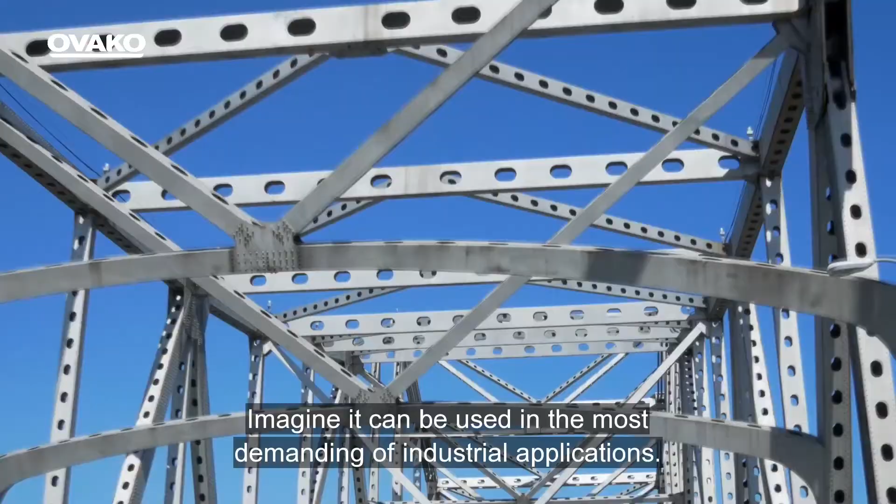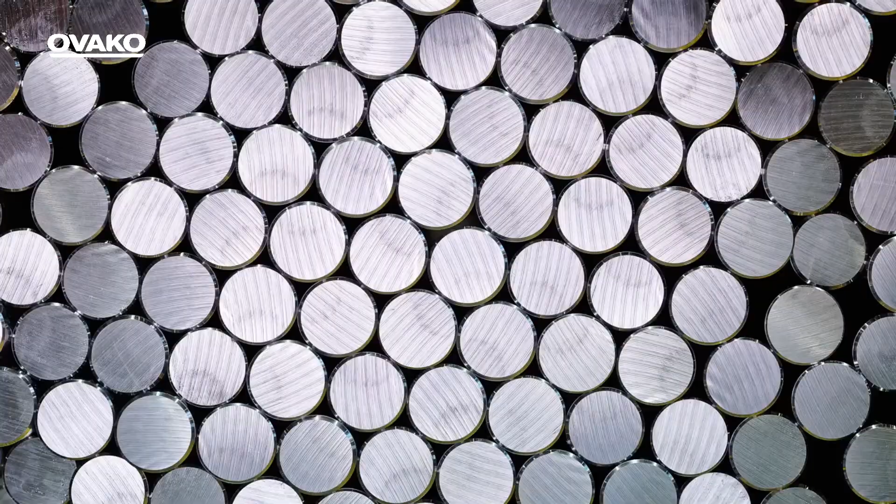Imagine steel of the highest strength and quality. Imagine it can be used in the most demanding of industrial applications. And imagine it can be used over and over again. Now, what would you like to do with it? We are Ovako. Our material is engineering steel, and we know that with the right steel, imagination is your only limit.

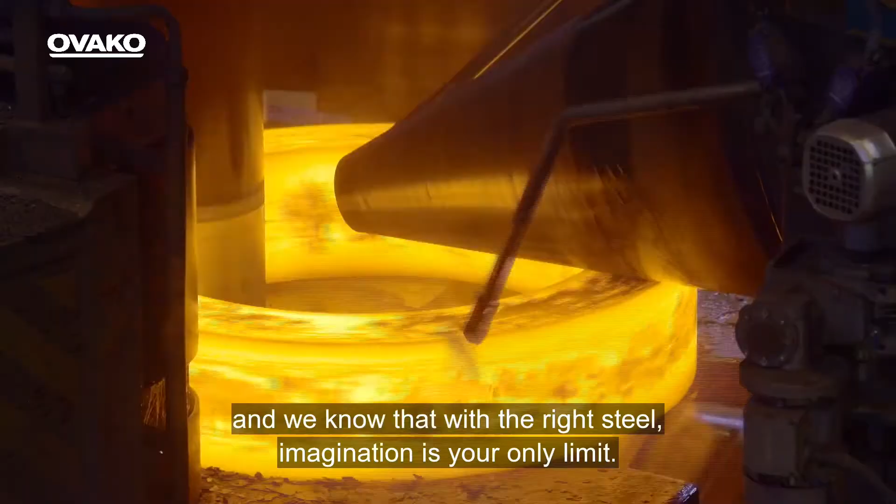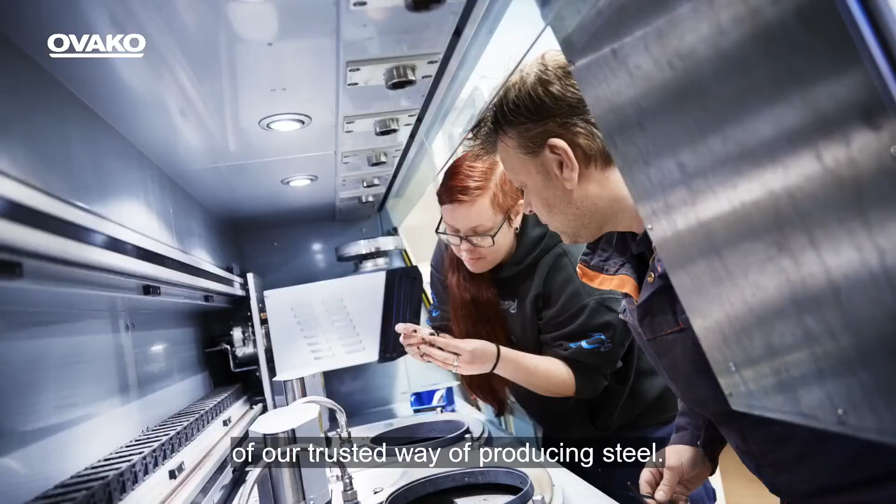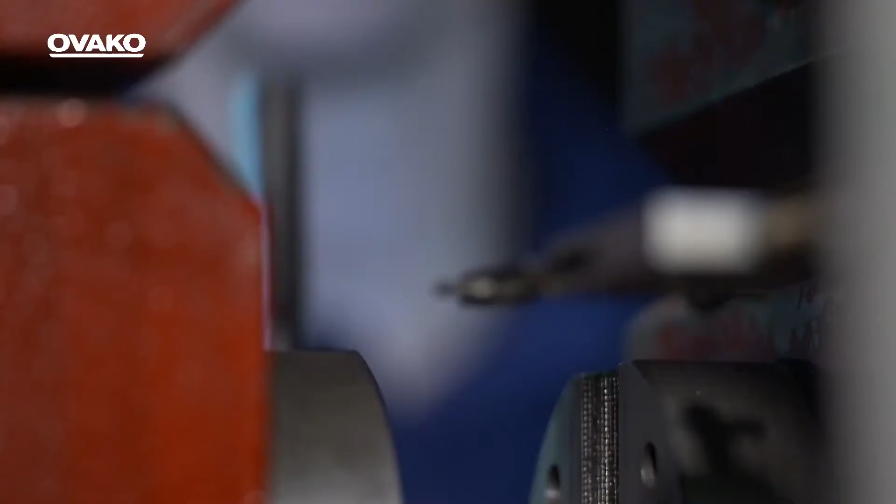We've been doing this since the 17th century. Throughout changes in the organization, the local production sites remain the heart of our production. And the knowledge of our people is the core of our trusted way of producing steel. Safety is our top priority in everything we do. We are determined to reach our long-term goal of a zero-accident workplace. We are proud of our way of working with broad networks in research and development. Together with our customers, we design steel that solves their specific needs.

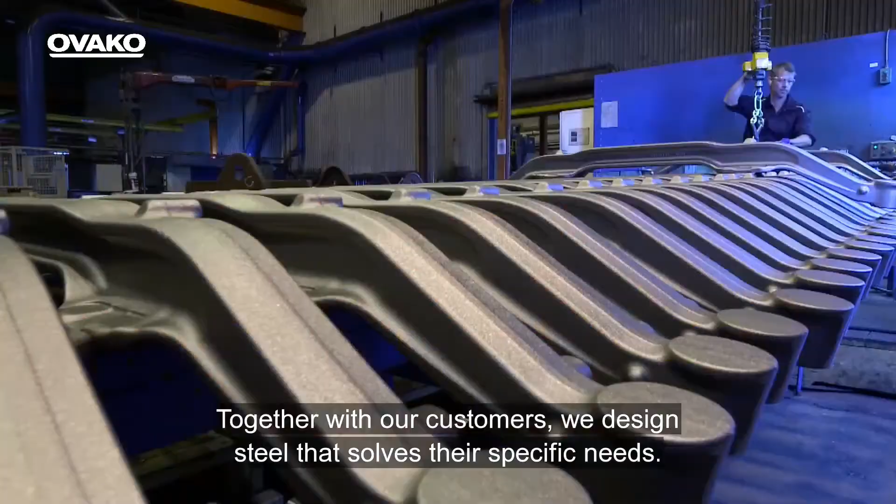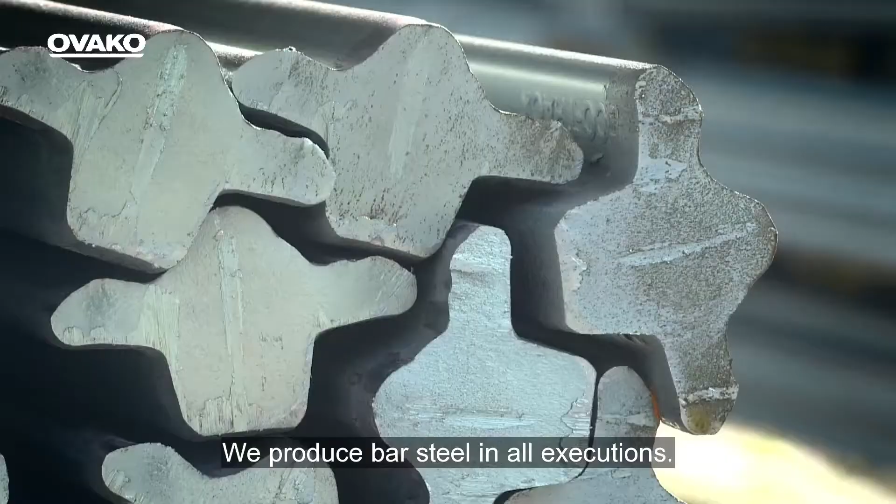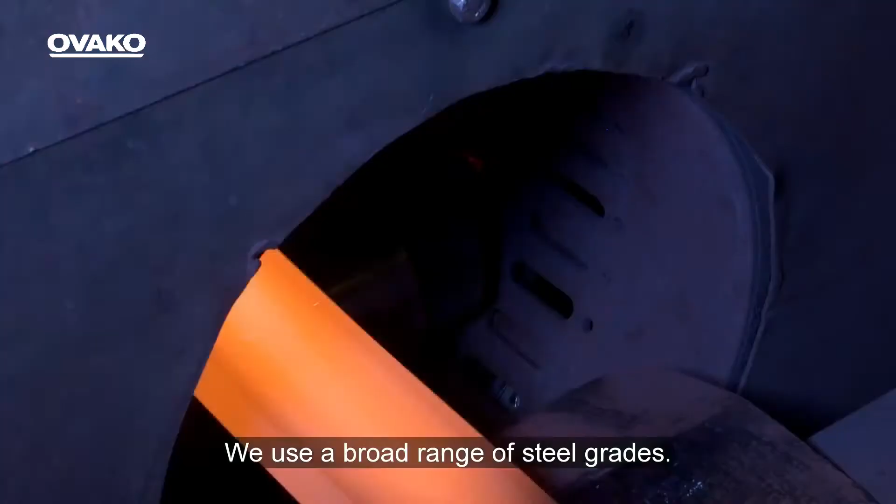All our steel comes from scrap. We produce bar steel in all executions. We also produce tube, ring, and wire, and supply an industry-leading range of hard-chromed long products. We use a broad range of steel grades. The steel grades are grouped into our brand families to meet different customer demands, proving again and again that imagination is your only limit.

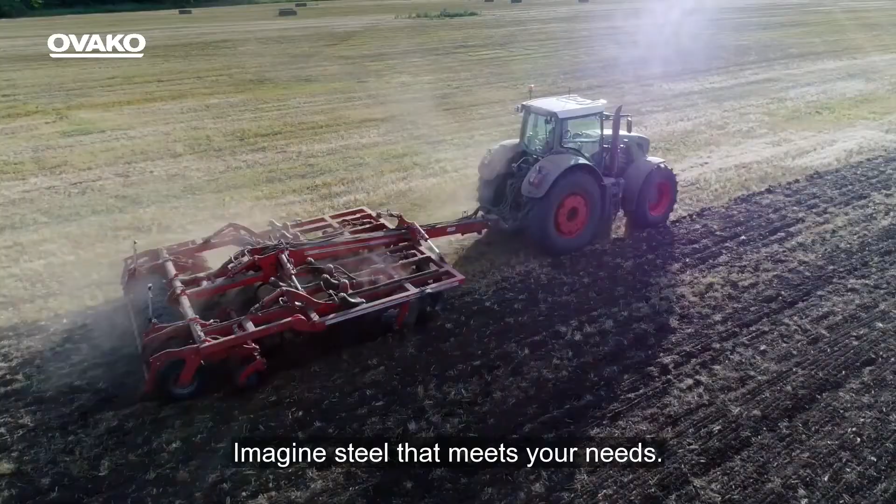Imagine steel that meets your needs. Now, imagine it being even better.

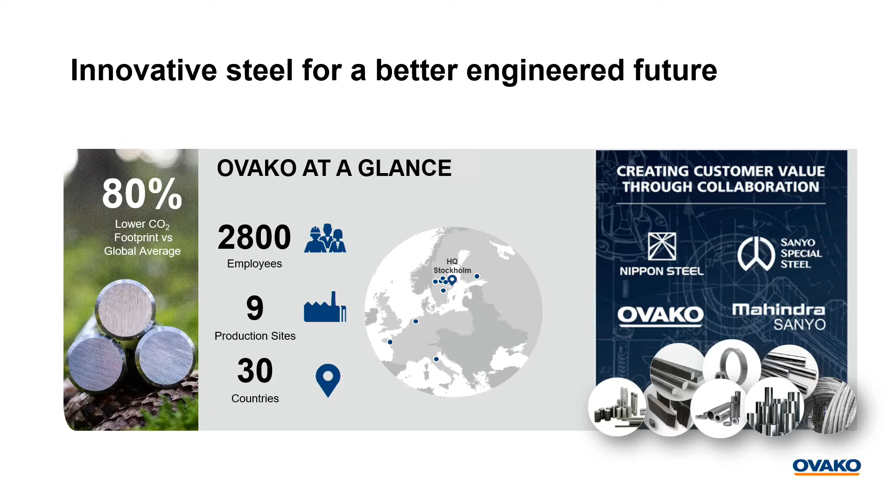largest steel producers in the world. Together with Nippon Steel and Sanyo Special Steel, we are and have a world-leading position.

And to conclude the high-level description of Ovako, I also want to mention our sustainability efforts, which I'm actually very proud of. Environmental aspects together with employee safety have always been a fundamental part of Ovako's business.

We have a carbon footprint that is 80% lower than the global average. And employee safety is top priority for us. And our long-term target is, of course, to have 0 accidents in our workplaces.

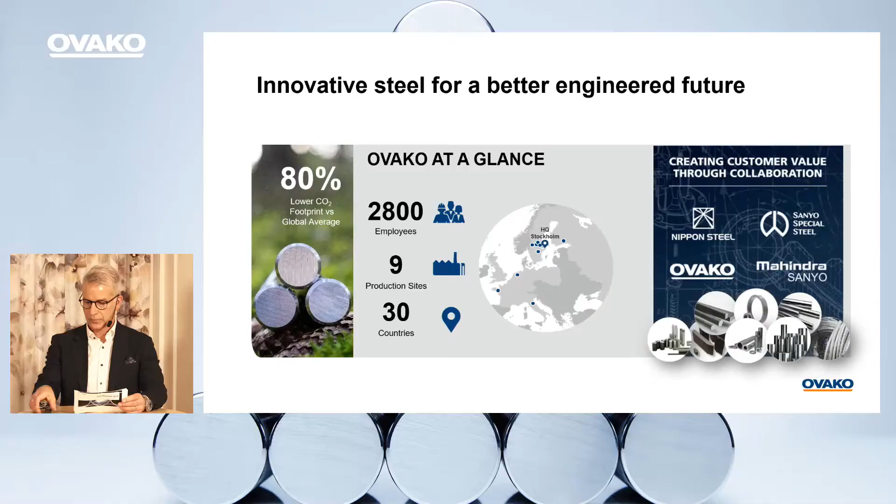Short about the business unit Smedbox. We have an efficient billet casting process with different rolling mills and the ability to customize steel products. We have a steel mill located here in Smedjebacken, where it's 100% scrap-based. We also have a medium section rolling mill and further downstream processes. It's a lovely picture from the Smedjebacken plant located in Dalarna.

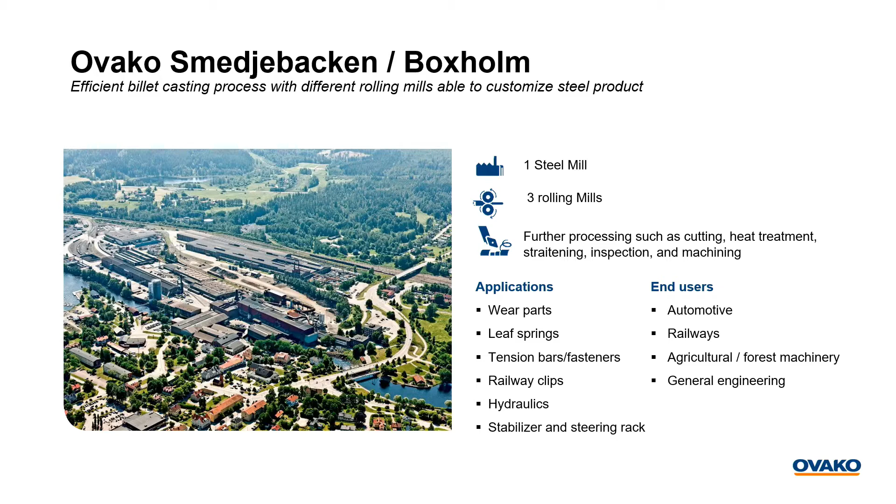We have a long tradition of steel making, starting all the way back to the 1700s. Today we are 540 skilled employees in the business unit, and we have the capabilities of rolling rounds, square, flats, and special profiles. In Boxholm, we have 2 rolling mills, one medium and one fine section mill, and also further downstream processing.

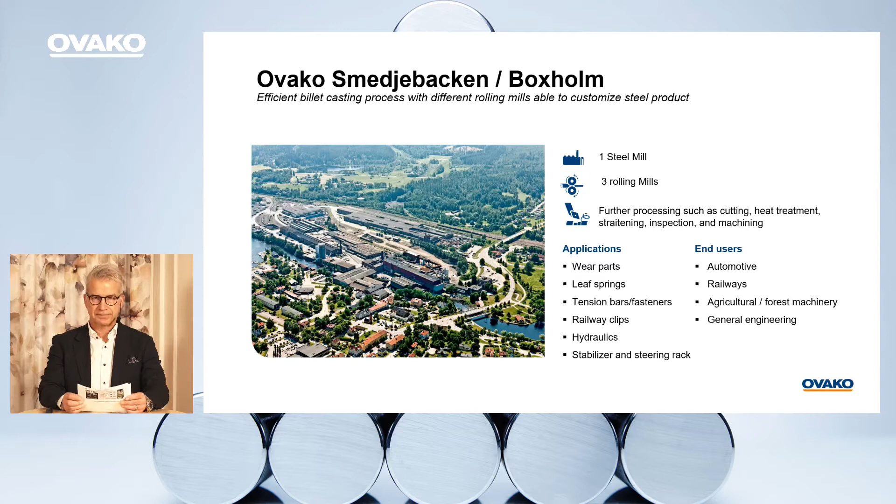Now back to why we are actually here: the investment in our vacuum tank degasser in Smedjebacken. This will create new opportunities for us. As you all know, the demand towards steel of higher performance and quality has continuously increased. I'm very happy and proud that our owner, as one of the first decisions they took, was to approve the investment in the vacuum tank degassing facility here in Smedjebacken. The investment will lead to improved steel quality, more efficient production flows, environmental improvements, and new business opportunities for us.

In this slide you see a picture, an old picture from the 50s, and a picture from our new vacuum facility. As you can see, a lot has happened since then.

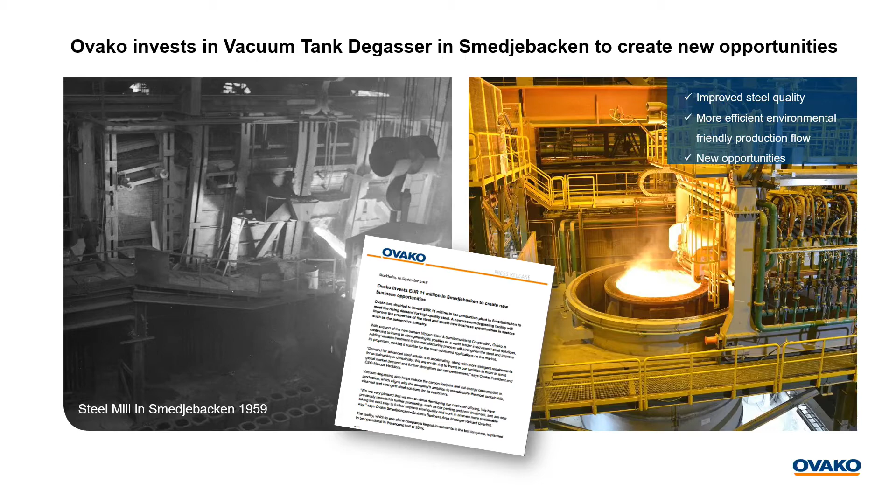The VTD investment, together with the investment we did in continuous casting in 2014, will take Smedjebacken to the next level when it comes to quality and performance.

One anecdote: back then, when they had the opening ceremony for the new continuous casting, I was here attending as a customer. I remember being really impressed by the investment they had made, but also remembering that in the end, I mentioned to the Ovako guys at that time that there was only one thing missing now, and that's the vacuum tank degassing.

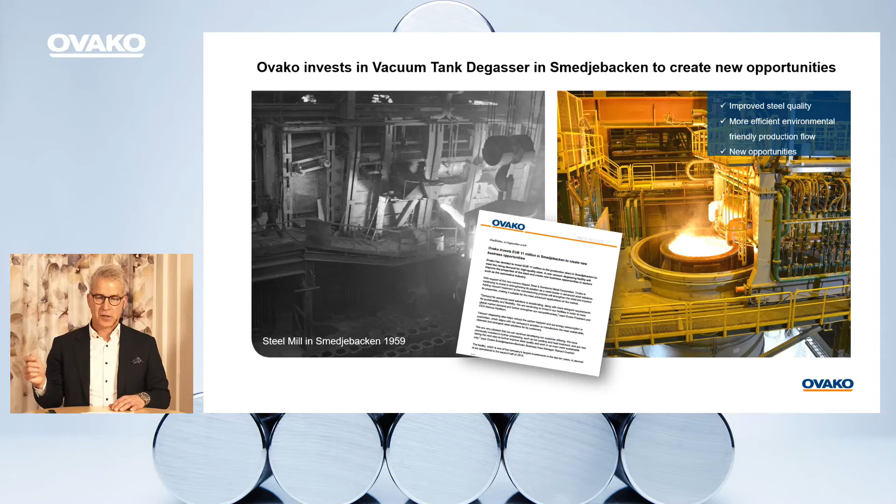So here I am, standing responsible for the business unit Smedbox, presenting our new investment in the vacuum tank degassing. This shows that we are really investing for the future.

With that, I will show you a short movie before I hand over the word to Göran Nyström, Ovako's Executive Vice President, Group Marketing and Technology.

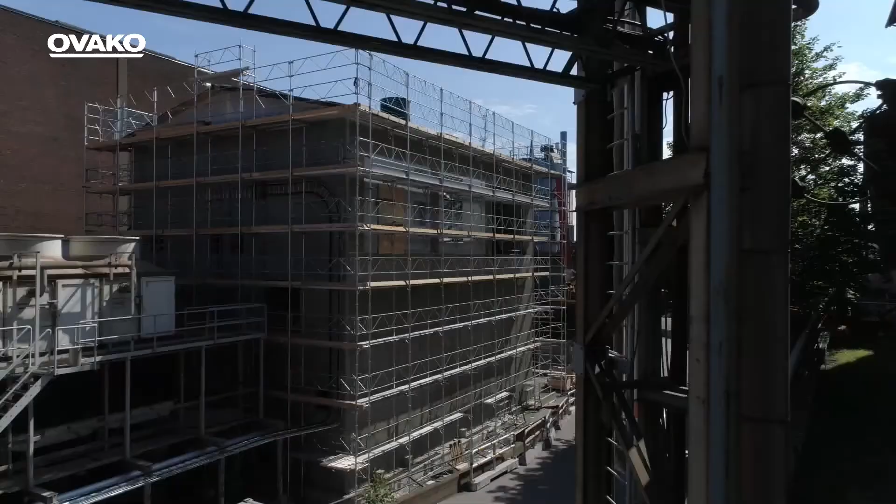So from one Göran to the next Göran, I'm pleased to be here as well. Of course, we would have loved to see you here in person, but we are filled with pride and joy to present our VTD investment here in Smedjebacken.

My role today is to talk about the growing importance of clean and sustainable steel, something we're also very happy and proud about. The world is built with the help of steel. 90% of all metal traded products are steel. One third of the mass of the earth is iron. So it's a part of our society, the building blocks for our society. But there are big differences between steel and steel.

At Ovako, our vision is innovative steel for a better engineered future. We believe that you can make a difference by choosing the right steel performance, the performance that is fit for purpose to create the best performing products.

With Ovako as a supply chain partner, we provide clean, high-performing steels that enable large CO2 savings in their end-use applications. This is our biggest contribution to sustainability in the world. But also, when you look at one ton of steel compared to another ton of steel, the cradle-to-gate footprint, all the carbon dioxide generated, we have among all our peers a world-leading footprint. And we can also provide you data for all individual product deliveries, the product forms, the alloys that you buy from us.

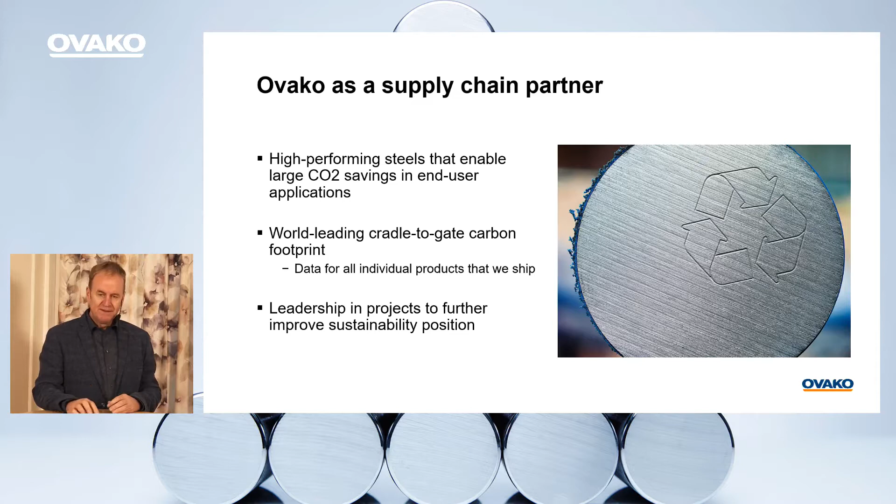Now, clean steel. I think most people by now realize that to make a really high-performing steel, you also need to control the inside of the steel, the cleanness of the steel. At Ovako, this has been a very important topic for a century.

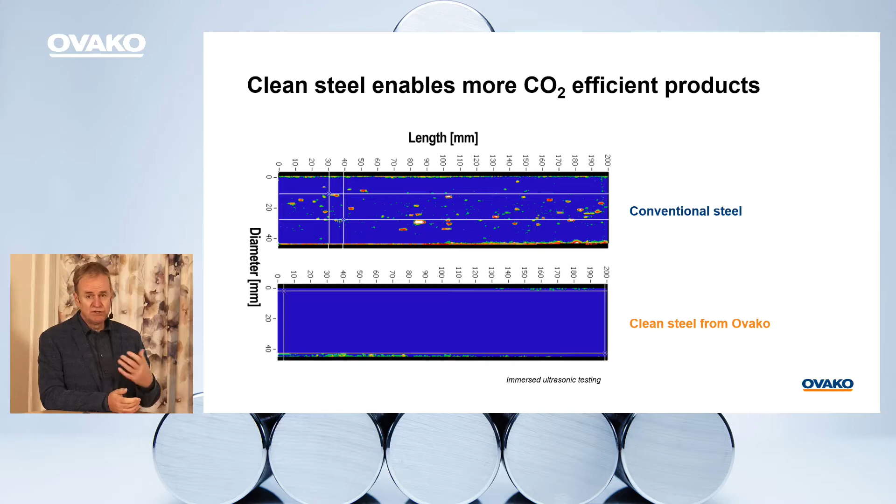We have different types of options depending on the mills we supply from. But typically, you can roughly say there is a large family of conventional steels, and then you have clean steels. It's not so easy to see the difference, but you can do it with high technology, ultrasonic scanning immersed in water with high frequencies, a technology that is constantly being developed. Then you can actually see the inside of the steel. On this image, you see the difference between conventional steels and clean steels.

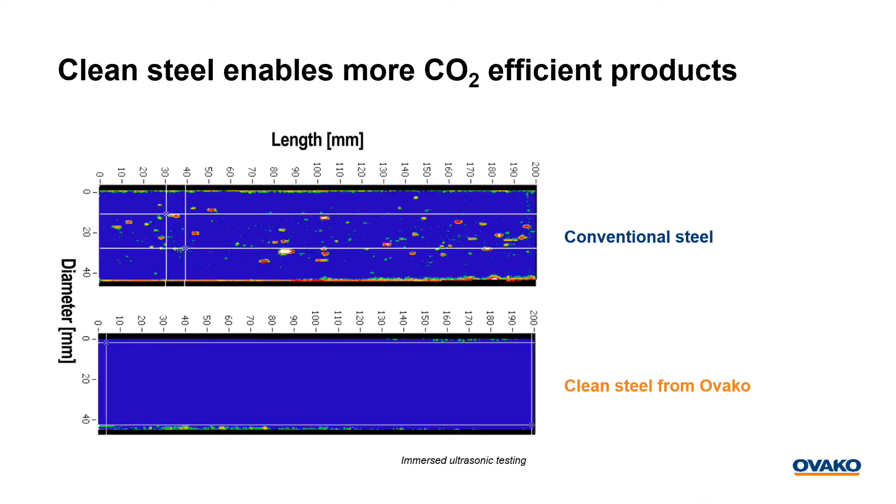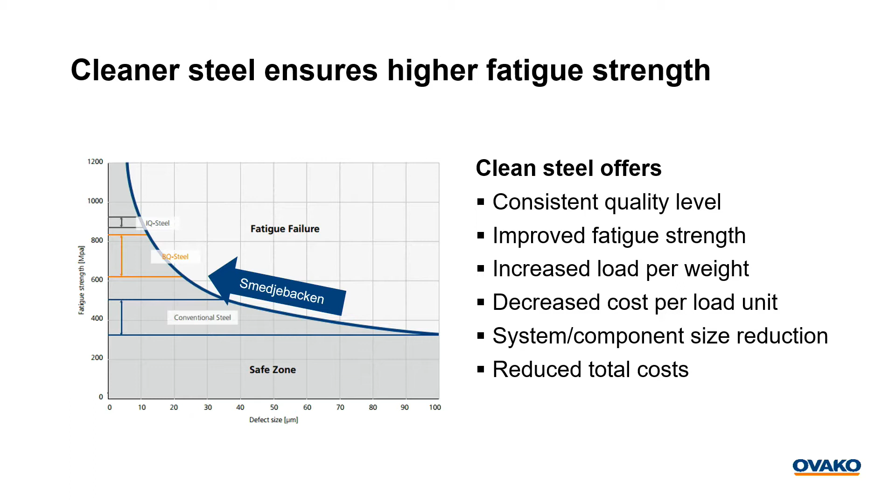We like to talk about this diagram, maybe a bit hard to read, but it shows on the x-axis the critical size of inclusions inside the steel, and on the y-axis, the fatigue strength. The fatigue strength is what decides how the product can be designed. In fact, about 90% of the world's failures is due to fatigue, it's been stated. So with a cleaner steel, you also ensure a higher fatigue strength.

Smedjebacken, by this investment, is moving up the ladder, taking a big leap and chasing what we already have in Imatra and Hofors. So the products become more dependable, and the designs they help facilitate can become smarter, lighter weight, longer life, reduced total costs. So congratulations to Smedjebacken, this is a big step.

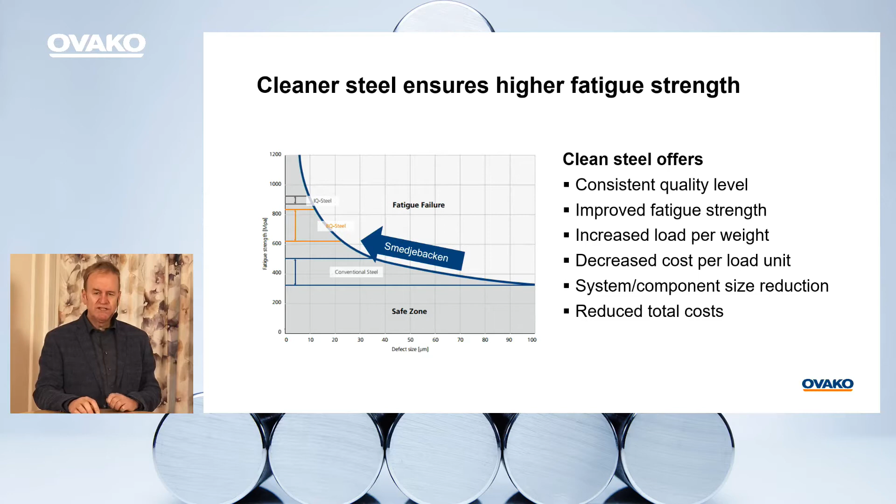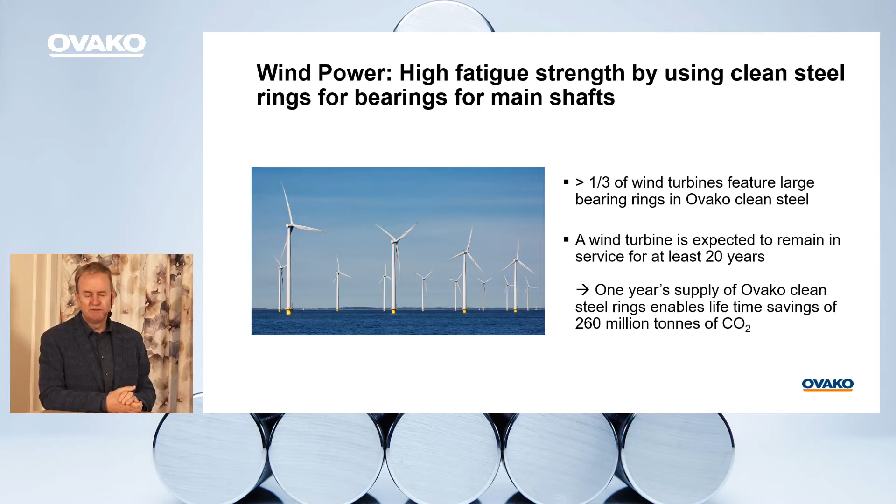Just one example of what our products can do in actual end-use applications. This is for wind power. More than a third of the wind turbines in the world feature large bearing rings from Ovako, in this case from Hofors. And when you look at just a small portion of what we produce in Hofors, one year's production of rings can actually facilitate a lifetime saving of 260 million tons of carbon dioxide. Big numbers.

But that aside, we also need to consider the carbon footprint of steel making. And since steel is so abundant on Earth, the total CO2 emissions from steel is quite large. It's somewhere 8 up to 10% of CO2 emissions on the planet.

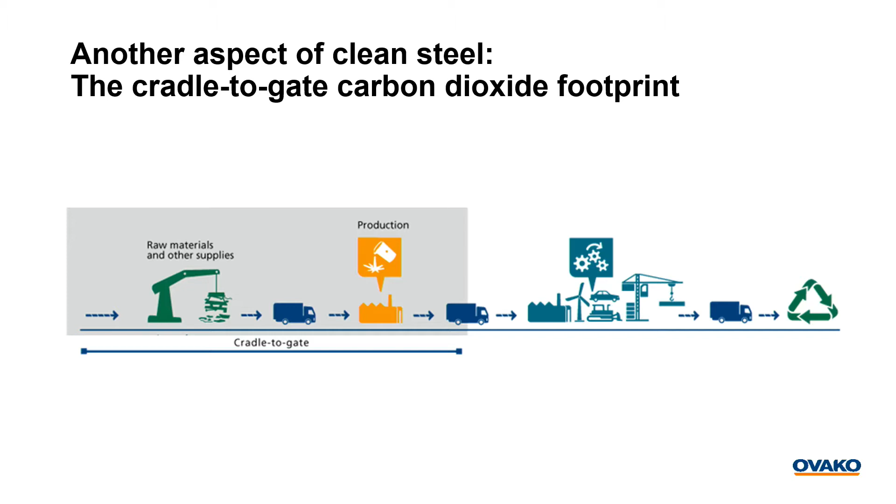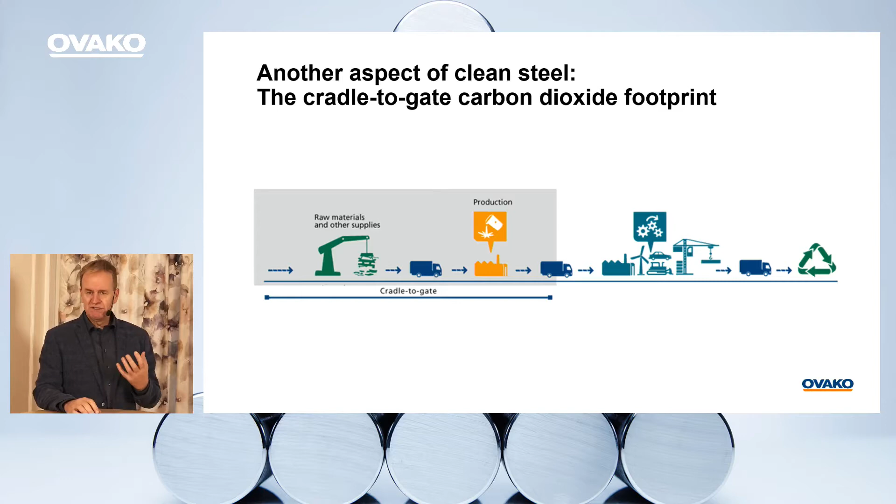When we look at this, we look at what we think is the only reasonable way of looking at it, that is to include all upstream sources of carbon dioxide. We take responsibility also for those. And then we combine that with our own operations, and then we look at the product that actually leaves our facilities, and we consider all yield losses, etc. That's what's called the cradle-to-gate carbon dioxide footprint. That means it becomes clearly measurable, and it also means taking responsibility.

When we do that, and we compare our operations, we actually find that Smedjebacken Boxholm operations is the best we have in the group. And among all our peers, it's the best in the world. So when we look around to try to find a better benchmark, we have not found anything that can compete with this. 389 is the latest figure, it's quite new. So again, congratulations, Smedjebacken.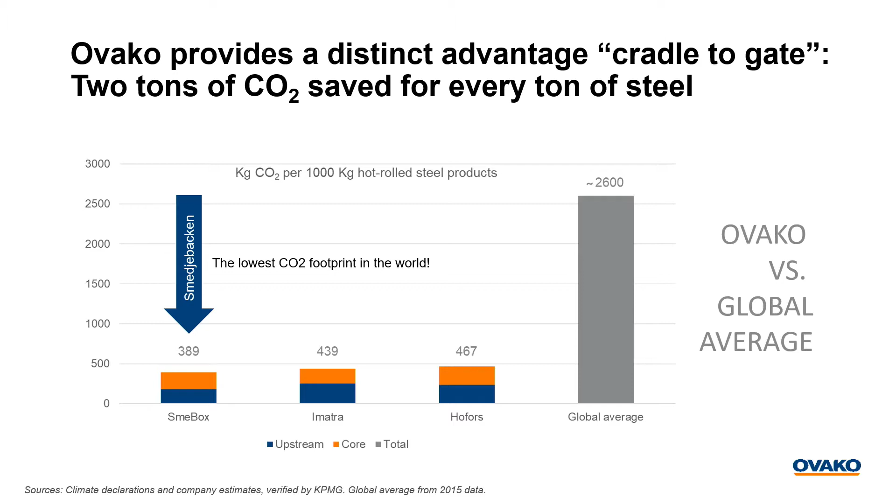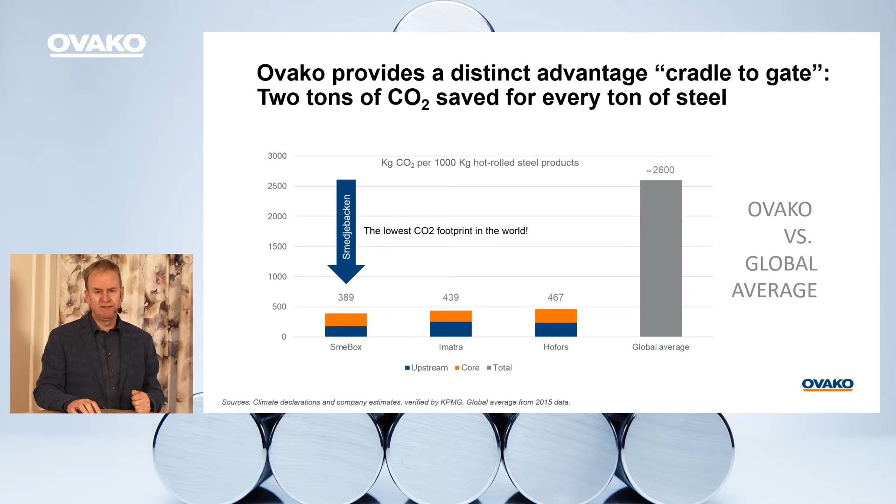If we look at the world global average, it's about 2,600 kilos, considering all upstream sources and yield losses. So we can say that by buying one ton of steel from Ovako versus the global average, there is a saving of 2 tons of carbon dioxide. And that doesn't go away. That saving, in a cradle-to-gate perspective, stays with the products that you, our customers, produce.

With this new VTD investment, we are taking further steps to improve sustainability. We believe it's around 3,500 tons per year of carbon dioxide that we are removing, and that's not yet included in the figures you saw on the previous page. So the cradle-to-gate footprint for Smedjebacken will continue to be improved.

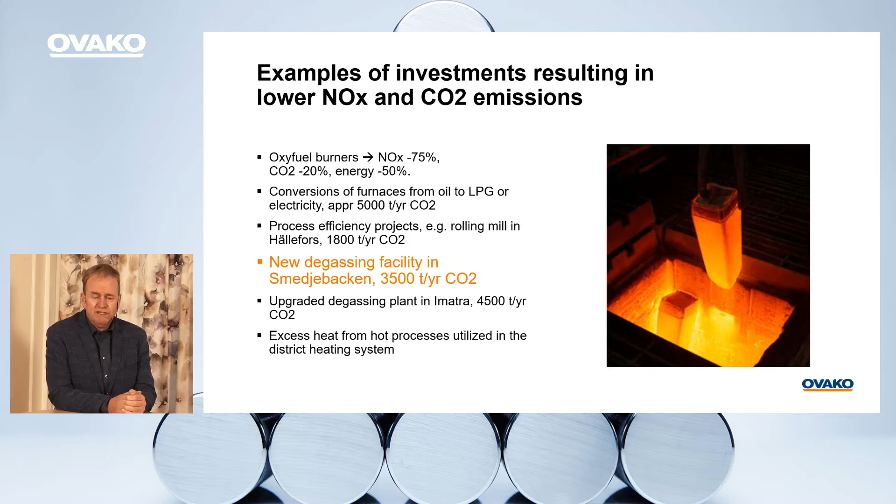And it's like this, by many steps, that we will continue to develop our leadership in sustainability. We will consider all upstream sources in our purchasing and make those decisions based on sustainability. And we will ensure a fact-based approach and give you, our customers, detailed product declarations where you can see what the carbon footprint is for our products. And we will lead the development towards further sustainability for us and for the steel industry by close involvement in a number of key projects. So this is our promise for the future.

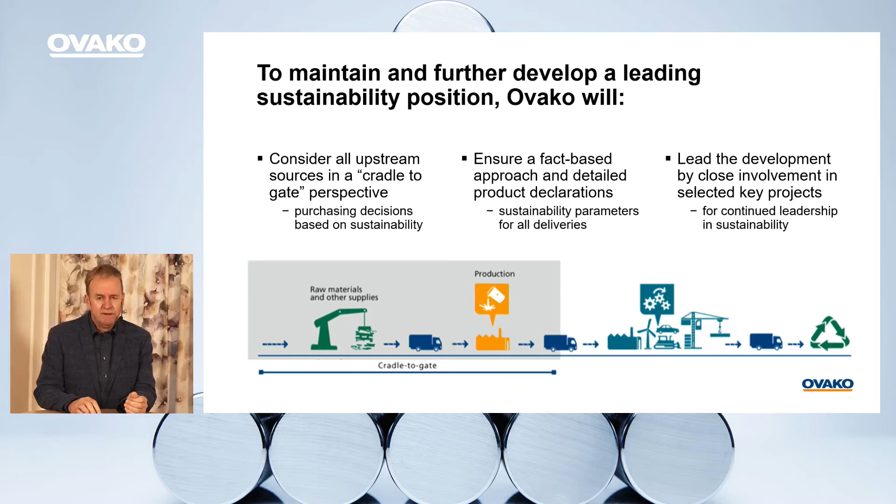So in summary, it's the value chain perspective that helps to promote the right decision making by working as a supply chain partner close to end-use applications, but also upstream. You saw how the cradle-to-gate perspective involves suppliers and all incoming materials. And you saw also how end-use applications, such as wind power, require close collaboration in product development and quality along this supply chain.

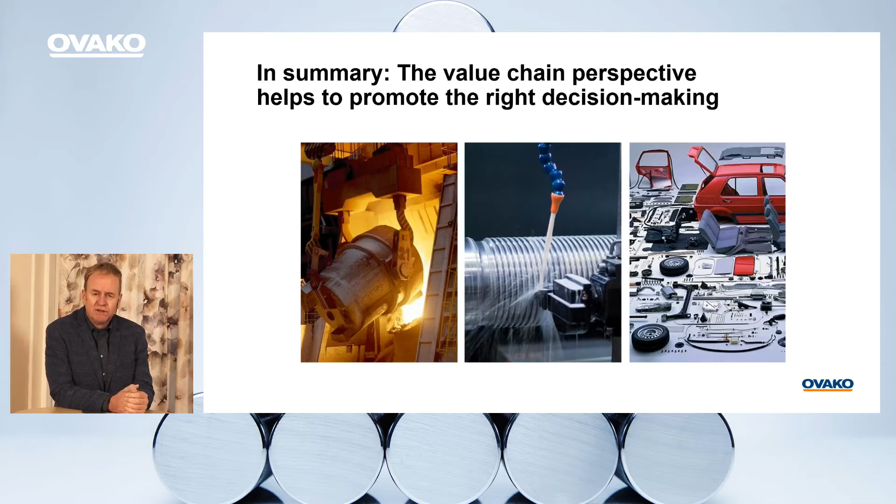In summary, this actually means that what you see here, Smedjebacken, with the blue water and green forests, is actually your strength. It's our customer's strength. What we do here to produce the most sustainable products, high-performing clean steels, is something that will be for the benefit of you in your products and in your cradle-to-gate footprint.

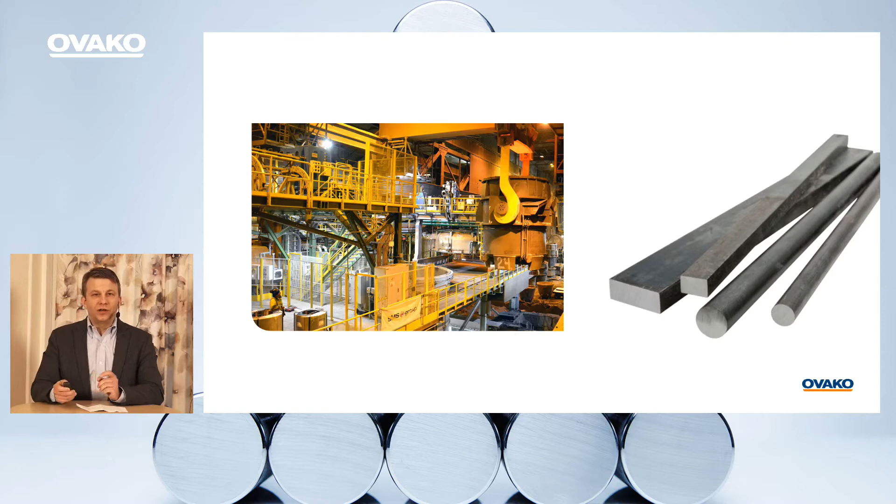I would like to start by going back a couple of years, to 2014, to talk about what was happening then.

In 2014, we made a big investment in a new continuous caster. We invested in a new caster for the future.

But not only did we invest in a state-of-the-art caster, we also made it possible to increase our billet size. Historically, we have cast 125 millimeter squares and 165.

With this new investment, we had the possibility to go up and cast 200 millimeter square. And the new caster is also prepared to go even further than that in the future.

This opened up a lot of new possibilities for us. Hans, you're out there on the market talking to our customers all the time. What was the reaction back then in 2014-15 when you came out? What was the response?

I would say the response was very positive, if not fantastic, because having the possibility to cast 200 square enables us to enlarge our product range and size range.

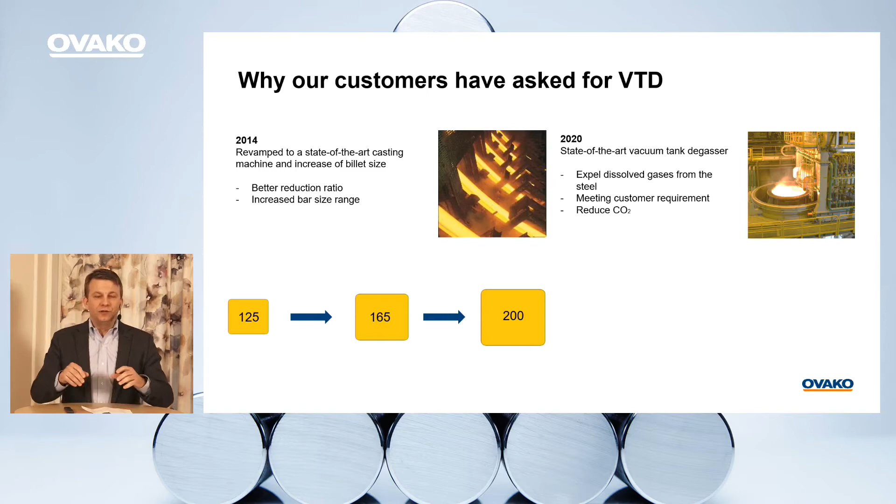Hans, with your long experience in the steel business, are there any special segments or products you see potentially going forward here?

Adam, I would almost say too many to mention. I think the vacuum tank degasser investment has been on our wish list for at least 15 years. It has been, in one of my previous roles, sort of frustrating that we saw a lot of inquiries demanding vacuum degassed steel.

And basically, we couldn't offer it. So to have that opportunity now is simply fantastic, is great. It's something that makes my sales heart beat a little bit faster.

Coming back to your question, I think one of the products that we already have is the SP bars, but in combination with vacuum degassing, maybe Adam, you can tell a little bit more about that.

Absolutely, I would love to. I think we can stop there a little bit and talk about our SP bar, and the reason and the key to the success that we've had with the SP bar.

Especially into the automotive sector, the key is repeatability. That's the benefit of the SP bar.

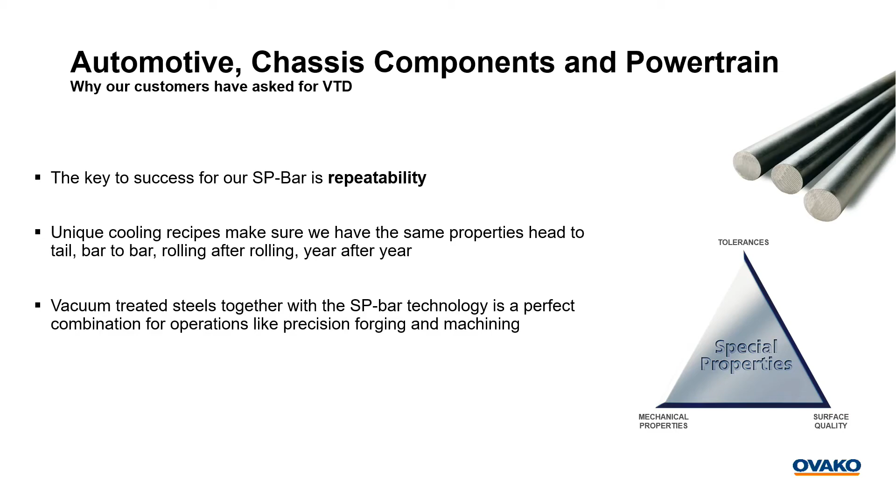This is because we can control the finishing rolling temperature. We are controlling the temperature during the rolling, and for every product we have unique recipes.

This means that we will get the same properties, head to tail, bar to bar, rolling after rolling, year after year. So you will always have the same properties.

Connecting this now with the SP bar, with the bigger billet sizes and the vacuum degassing, that's going to be a fantastic combination going forward, especially towards the automotive and forging industry and machining shops and so forth.

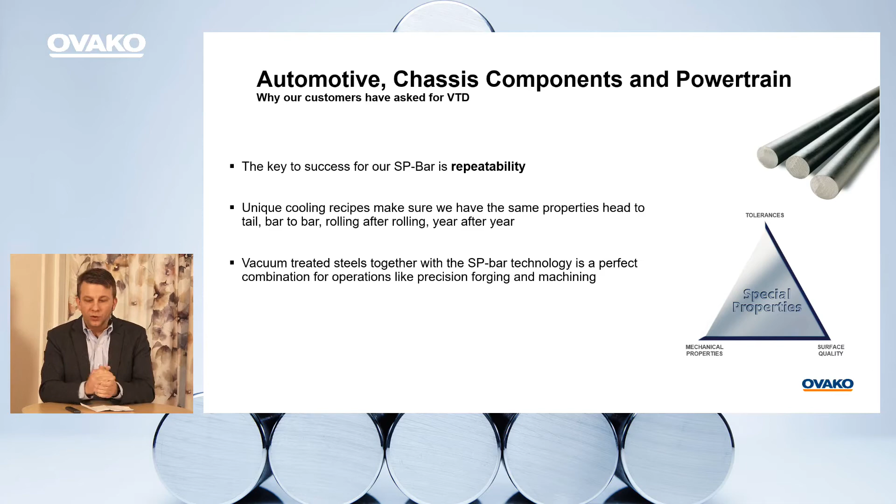So just bear with me here, Hans. We see new potential, but we've also developed products with the SP bar for 10, 15 years.

Especially into applications like steering racks and stabilizer bars, for both cars and commercial vehicles. But of course, our customers are developing, and we want to follow.

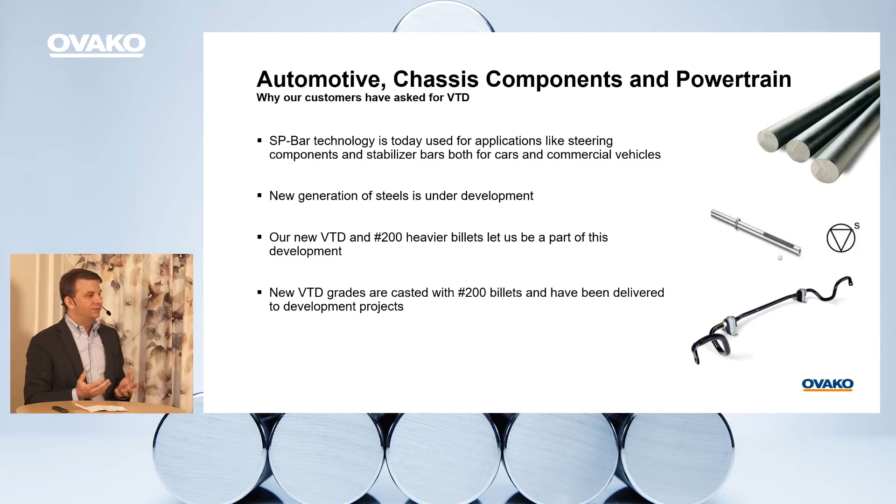And we see now with the new steels coming out that the requirement is that we need vacuum degassing and bigger billets to fulfill the properties that they are asking. We have already produced grades for these applications that are under development and on the way out on the market.

But Hans, we've talked about round bars, but Smedjebacken is much more than just round bars. 50% of what we're doing are flat bars, also into automotive. With your experience, can you tell us what you see as the potential from the flat bar side? Yeah, gladly.

Flat bars, as you mentioned, is 50% of what we do, and especially in the spring segment we've had a very interesting journey, I'd say 15 to 20 years. We've established ourselves as a quality supplier, known for very good surface quality, which is a very important criteria in this segment. But also here the demands on the steel, the fatigue life etc., is increasing, so now adding the vacuum degassing gives us another plus in the market and will strengthen our position even more.

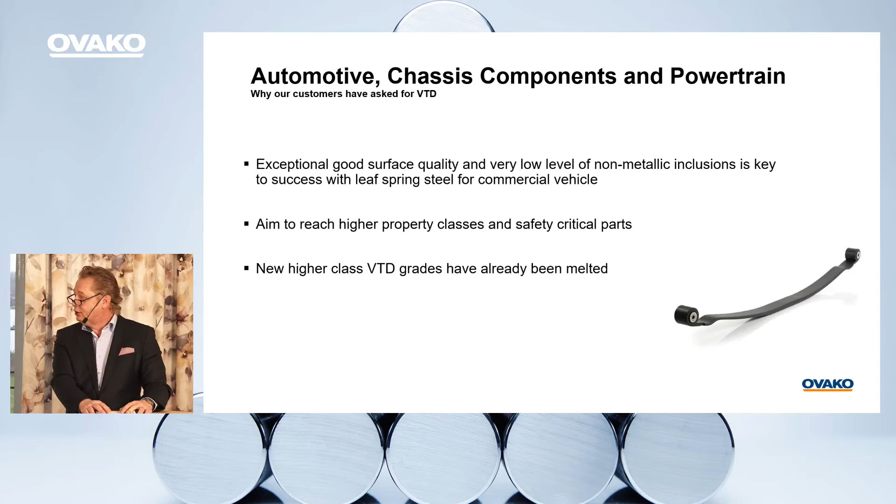So we can conclude that we see great potential both into automotive, on round bars and flat bars. But we are into other segments as well. Can you tell us about other segments where we can benefit from this new investment?

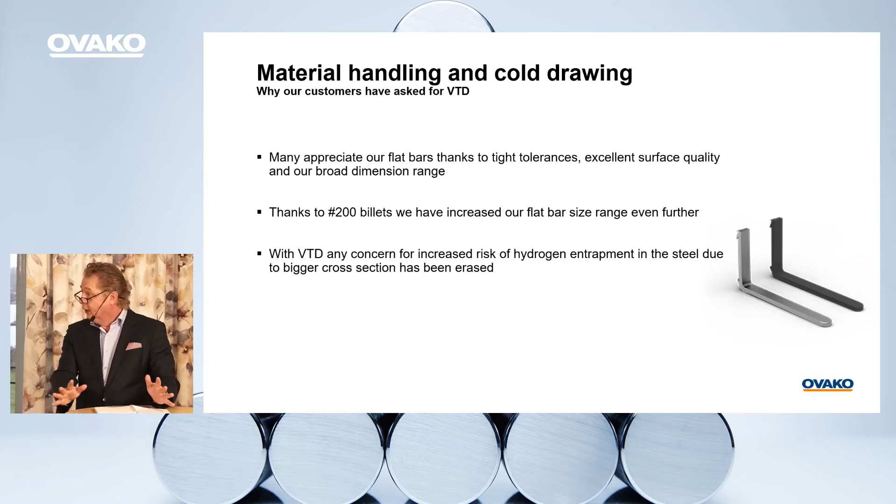Yes, as you can see on the slide, we have big customers in cold drawing our steel, which now with the 200 square billets we are offering in bigger sizes. But one aspect where the vacuum degassing is really important is in lifting equipment. It's nice to have bigger sizes, but in this segment with these specific steel grades there's a risk of hydrogen entrapment, which can lead to failures of the steel. With the vacuum degasser in place, we eliminate that risk completely, so it's not only bigger sizes but we can deliver a stronger, better, safer steel. Again, a bonus for us.

Now we've talked about existing segments, flat bars and round bars, but could we share, Adam, a segment, an application where we're a little bit new in? Absolutely, I'd be glad to do that.

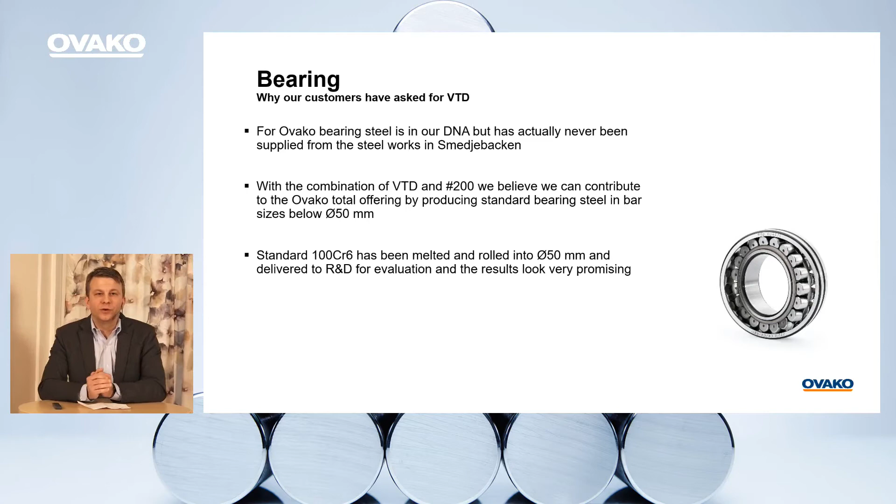As most of you know, with Ovako it's bearing steels, it's in our DNA. With the beautiful steel plants at Imatra and Hofors, we are producing the best bearing steels in the world with the IQ and the BQ. But now with the combination of vacuum degassing here in Smedjebacken and the larger billet possibility, we see that on the standard bearing, on smaller sizes below 50 millimeter, we can be a part of this and contribute to the overall offering from Ovako.

And actually we have already produced in our new equipment here 100 chrome 6 standard bearing grades. It's been melted, rolled to 50 millimeter, and we've sent it to our great R&D research center in Hofors, and they've evaluated this, and so far it looks very promising.

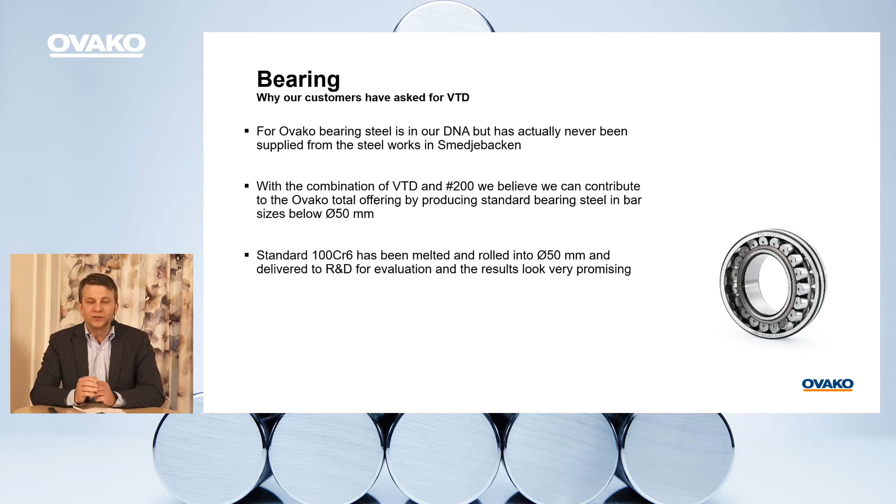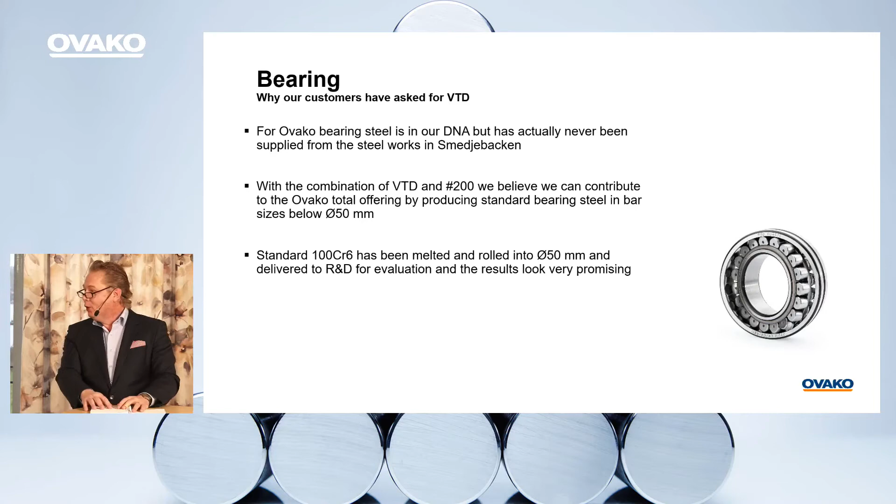Hans, you've been in your previous role key account manager for the big bearing customers out there. How is your reaction to this? Yeah, more opportunities for us. In my previous role dealing for one of the major bearing accounts, being proud of having represented Imatra and Hofors in this business, there was always the missing link, the question of what about Smedjebacken. Bearing steel without vacuum degassing is just not going to happen. So I'm completely agreeing that having the facility here in Smedjebacken will enable us to expand the portfolio of Ovako and play an even bigger role in the bearing segment. Very exciting.

So we can conclude that we've touched upon a small portion. There are much more opportunities and possibilities out there that we can, together with you, our customers, benefit from. So what we'd like to do now is talk to our specialists, the ones who really know what they're talking about, to get a better understanding of the investment here in Smedjebacken.

So welcome, Johan Lyttbacka, process development of the steel mill, and Anneli Arnhelm, manager for technical customer support. We're going to have some questions here, and I'm going to start with you, Johan.

Can you just shortly describe and explain for our customers how the vacuum degassing process works here in Smedjebacken?